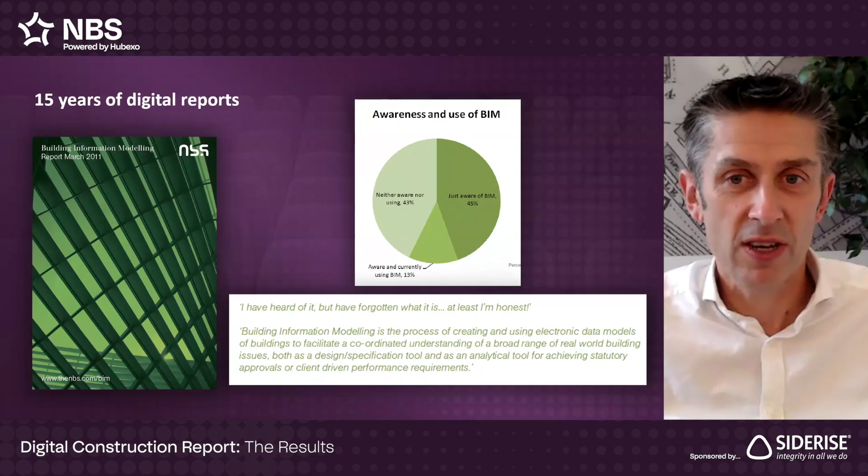I think understanding of BIM aspects of digital has evolved, and the majority now see it as that process of gathering well-structured digital information through the project timeline based on clients' information requirements. And I guess we've gone through a journey from the UK 1192 standards through to the international ISO 19650 series.

So when we ask now in 2025, 15 years on, how would you describe BIM, following the process in the 19650 standards comes out highest, but it is better information management - like building information modeling is modeling the building or the asset with 3D data with information attached, etc. But it's quite interesting looking at how the definition of BIM has changed over 15 years.

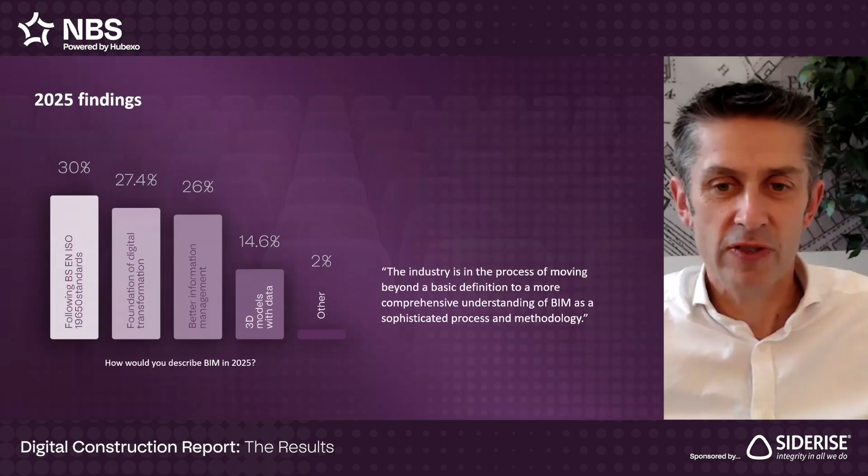In terms of adoption rates from self-declaration, have you adopted BIM? We've seen it move from that sort of 10% up to mid 70% over the 15 years. It's quite interesting just looking at the BIM object sort of thing.

Encapsulating data in an object - we started by asking manufacturers, do you provide BIM objects for the materials and product systems that you supply? We had about 20% of manufacturers saying for all products, in the mid 70s for either all or some.

And then you compare that with the sort of demand side, asking architects and engineers, is it useful to get this information from manufacturers? And it's similar, that sort of supply versus demand, maybe slightly higher - so the regularly or occasionally comes up to near 90% here, whereas it's sort of 70, 75 on this side.

In terms of the basic data structure to classify information, whether it's the design of a building or an asset or the whole project in terms of classification for documentation, project management, or spaces, that BIM ecosystem on a project in the UK, we see now in 2025 that uniclass is the predominant classification system.

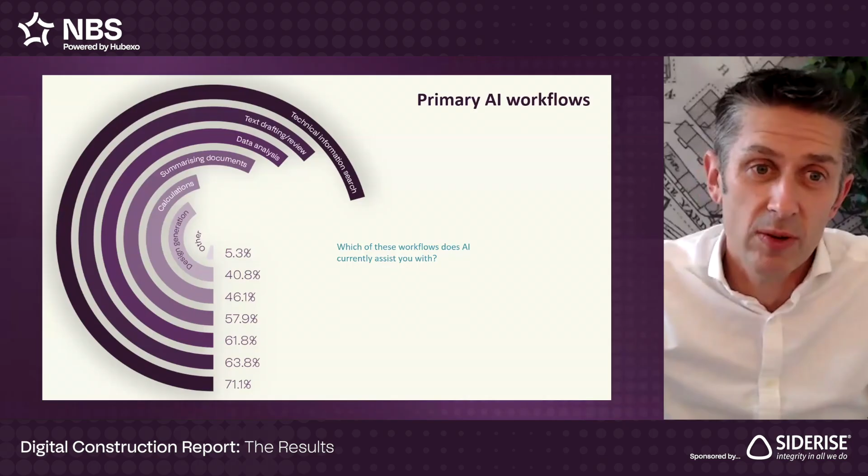It's, I guess, taking away those more monotonous tasks with well-structured data and making them quick. So whether you're searching for the right information, whether you've got some copy and you want to change it around and rapidly look at different drafts, if you're analyzing data, if you're summarizing documents, doing calculations, it's the sort of tasks that you maybe previously would have given an assistant, and it might take a few hours or a couple of days to come back to you for your review.

Maybe not immediately trusting the answer and accepting it, but getting the AI tool to do the initial job, so then you can check and then refine. Up in that 50 to 70% range on those tasks, you can see that in the chart.

And then in terms of the tools, we have ChatGPT currently leading the way, 86%, and then dropping down through things like Copilot, Gemini, Claude, etc. It's a bit like when the internet first started and you saw the different web browsers like Internet Explorer and Chrome and Safari and things.

There's a big race at the moment from the technology solutions in terms of who can accelerate the fastest on artificial intelligence. And then, how do you expect AI to impact your work over the next 2 or 3 years? I think 66% saying significant change, and then nearly 1 in 4 saying it's actually going to be a transformative change to day-to-day work. So it's going to be an interesting next 2 or 3 years seeing where AI takes us.

Other initiatives in technology that we're seeing, and we asked about digital product passports. That's something mentioned explicitly in the EU Construction Product Regulations 2024. So in simple terms, taking the concept of things like CE marking, which has the key technical characteristics of a particular product printed as a label on the physical thing, moving that forward, both in terms of technology and scope of content, to something like a QR code or an RFID on the physical item, which takes you online to give you the technical characteristics of that product and sustainability information, and how to safely install, operate, and deal with it at its end of life.

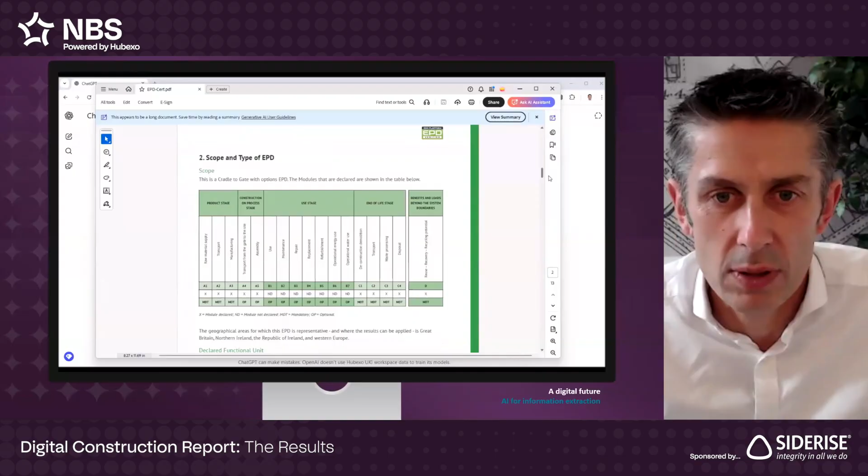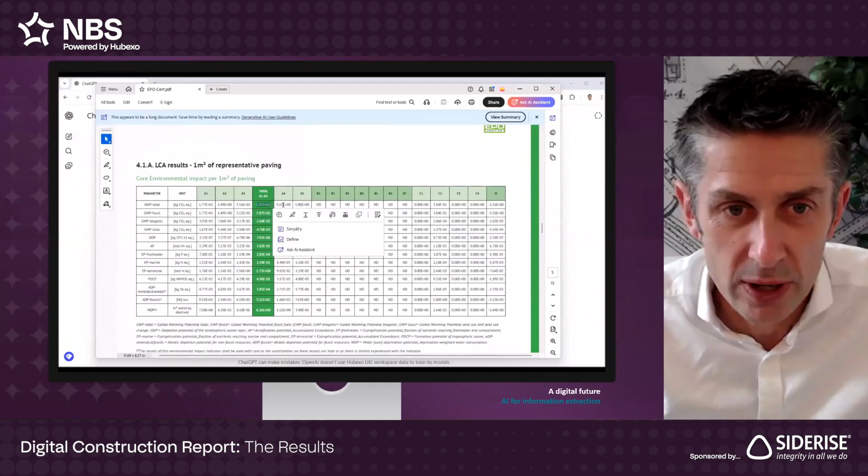So if we have a little look at this example, we let it play. It's an EPD from the manufacturer for concrete slabs or what have you. You can see written into the text in an unstructured form it says there's 1 meter squared of paving as the declared unit. In terms of the global warming total, it's 5.07 times 10 to the power of 1. In terms of assumptions on transport, it's saying the construction site's in Birmingham, the factory's definitely in Northern Ireland, it's going to be a combination of road - so there's loads of great information here. It's just laid out to look pretty in a PDF as opposed to structured data a computer can read, I guess, until AI came along.

Because now I'm taking that semi-structured information laid out really nicely in a lovely looking PDF into data that could just sit in a database. You can imagine running this process on 1,000 PDFs, you're going to build up a really nice set of data. It's got the manufacturer name correct, it's got the postcode, it's got the different variations of the product, 1 meter squared A1-A3, and it's got rid of the scientific notation of 10 to the power of 2 or whatever, 10 to the power of 1.

And it's got the transport split down by road, and there's the manufacturer plant location with a postcode as well.

The last example I'd like to look at is combining well-structured data from a number of sources online and pulling it together as a single view. What I could do here is say, tell me about the elderly burgundy brick from Ibstock, and just send it away on the internet to look at information. But instead, I'm going to send it the unique ID representing this brick from its barcode.

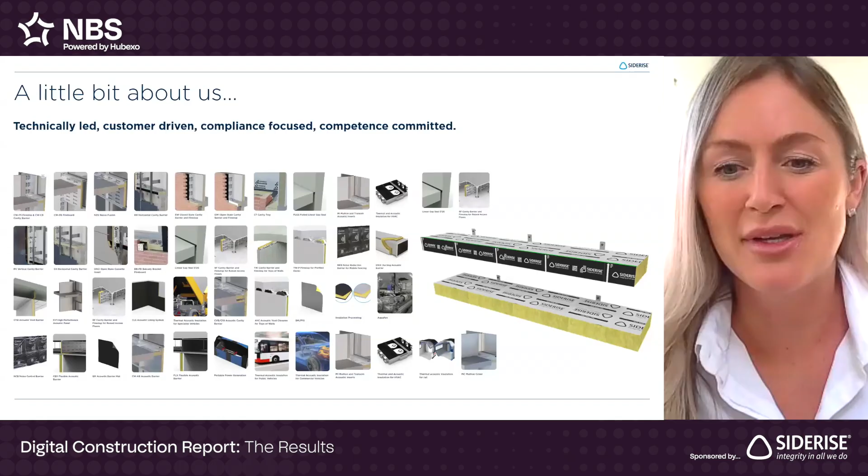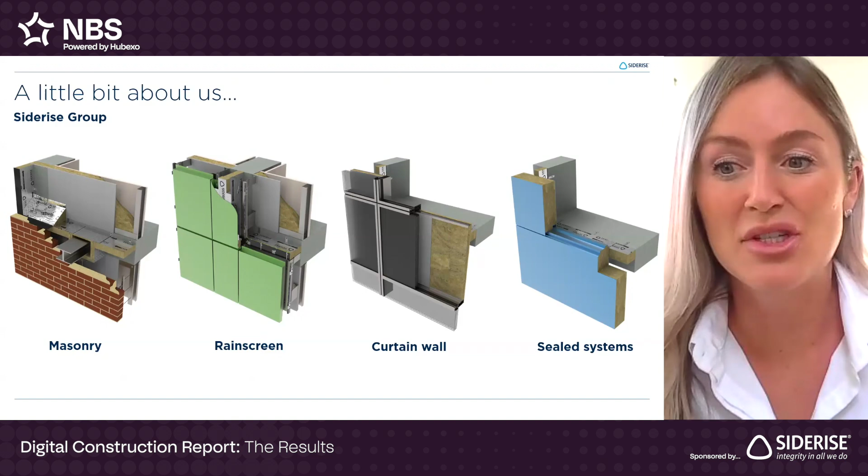We supply acoustic and thermal products for facade and building interiors, and we specialize in the manufacture of tested and third-party certified stone wool, cavity barriers and fire stops that are used in horizontal and vertical orientation to provide compartmentation and resist the spread of fire. These are used in many different applications, such as external masonry, rain screen facades, curtain walling and sealed systems such as precast and composite panel as shown on screen.

As we all know, digital tools are becoming increasingly important in the construction industry for a number of reasons. They help ensure compliance and maintain accurate data records, promote accountability and allow decisions to be tracked more effectively. They also improve project management, increase transparency and trust amongst stakeholders, and encourage collaborative working across the supply chain.

As the industry faces growing regulation complexity, with the implementation of the Building Safety Act, there's a rising demand for traceability and real-time information. Digitalisation is helping us meet these challenges, transforming how we work by making processes more efficient, connected and reliable.

Siderise offer a wide range of digital tools and services that provide support prior to project start, throughout design and construction stages, all the way through to completion and handover. On screen here shows a few that include data easily accessible through NBS, RIBA CPD content, Siderise Learning Academy portal, our Siderise Tech Hub website, NBS cloud-based collaborative specifications, BIM models, standard detailed drawings, digital spec packs, digital site inspections and our inspection app.

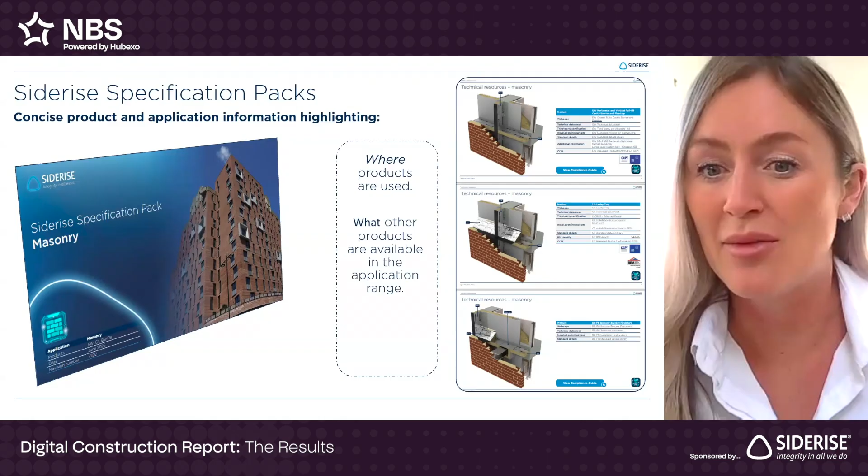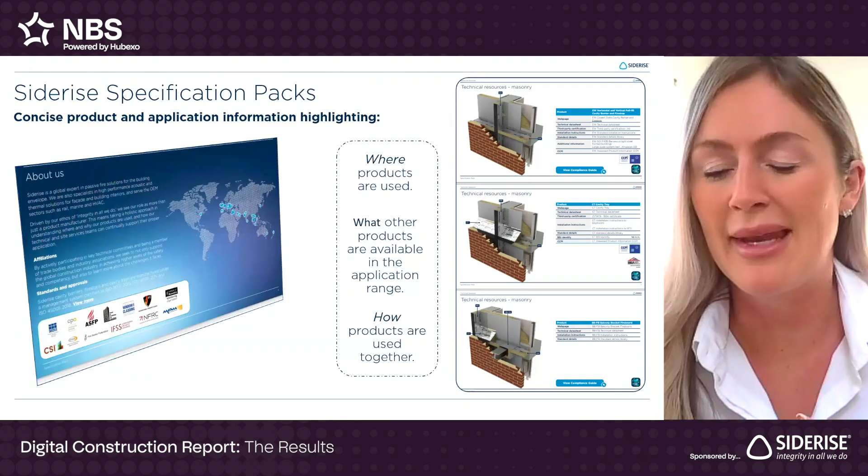These packs provide a packaged, up-to-date digital resource with valued formats of data, including live links to key product information. We decided to make the packs application specific to really help our customers understand where the product should be utilised and what other products are available in the range and how they're used together, offering a systemised approach. Just like a lot of manufacturers, our products have their own references, so offering information in a way that allows customers to easily identify what products they need for a given application.

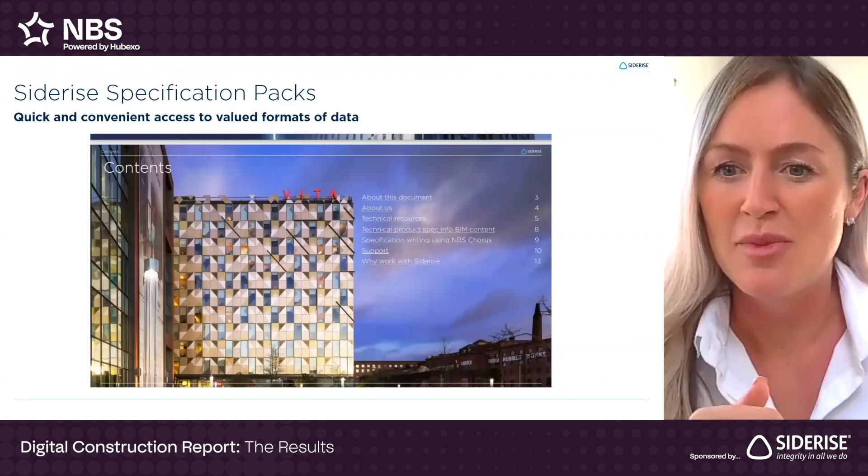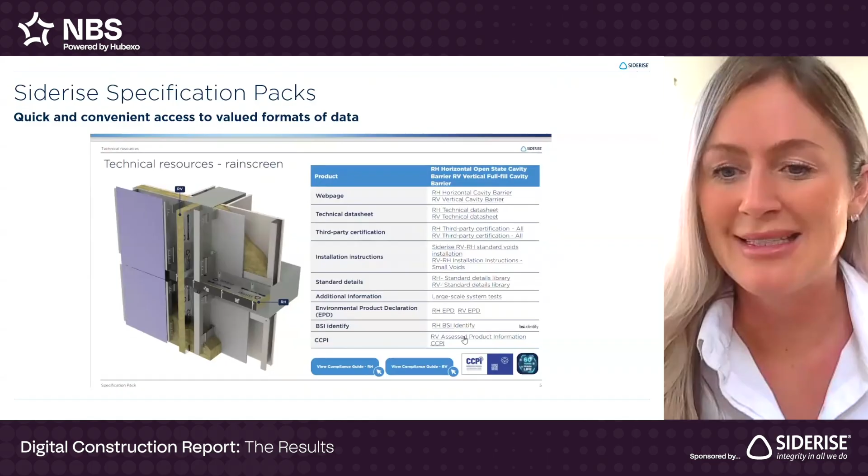We'll take a look at one of the packs as an example—the rain screen pack. The specification pack provides quick and convenient access to tools and information sources, including technical data sheets, third-party certification, standard detailed drawings, EPDs, BIM objects, specification clauses through NBS, and it also demonstrates which products have CCPI assessments. Additionally, by including links to the latest information, users can be assured that they're working with the most up-to-date information and certification, reducing the risk of holding outdated material.

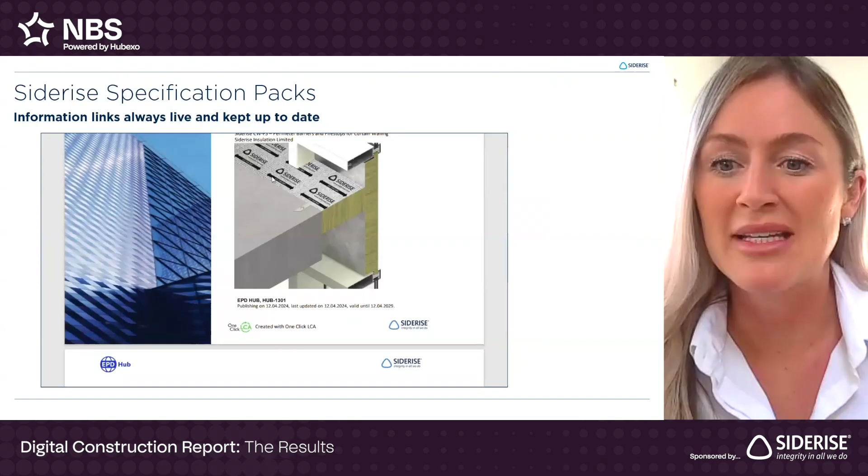All of our specification pack information is linked directly into our Siderise PIM system, our product information management system. We utilise permalinks, so the information remains live and is always kept up to date, and we maintain the version control of the documents within our PIM as well.

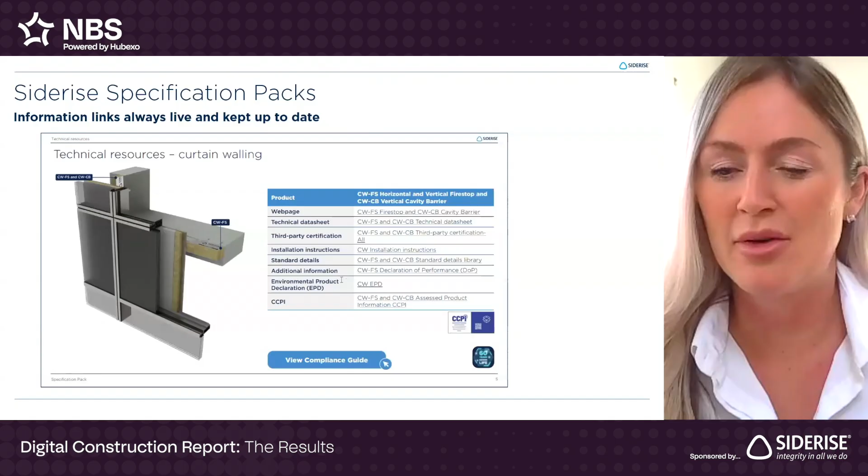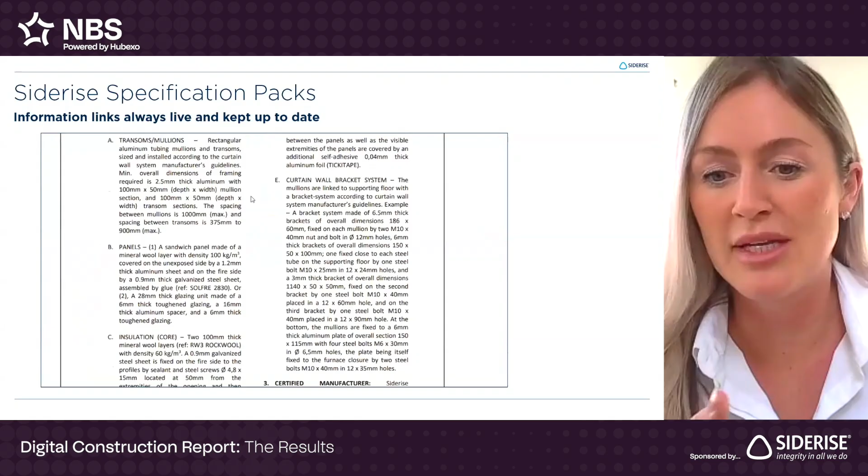We've recently developed path to compliance diagrams that are included into each of the spec packs through live link buttons. The compliance paths give an outline of how the products have been tested and how they meet the relevant statutory requirements. This is aimed to assist all of our customers, including those who are going through Gateway 2 submissions.

Within the specification packs, through our websites and through the NBS and RIBA websites, CPD material can be sourced. In the last year, we've developed 4 new pieces of RIBA approved CPD material. As a company, we're really proud that we're developing this educational material, including RIBA approved CPDs for all of our core products used in rain screen, masonry, and to the rear of curtain wall.

As a company, we want to encourage early manufacturer engagement, share knowledge, and ultimately promote learning. We want to help our customers enhance their understanding of passive fire protection in the building envelope. In our new RIBA CPD, we cover product terminology, testing standards, certification detailing, and additional services that bridge the gap between design and as-built performance.

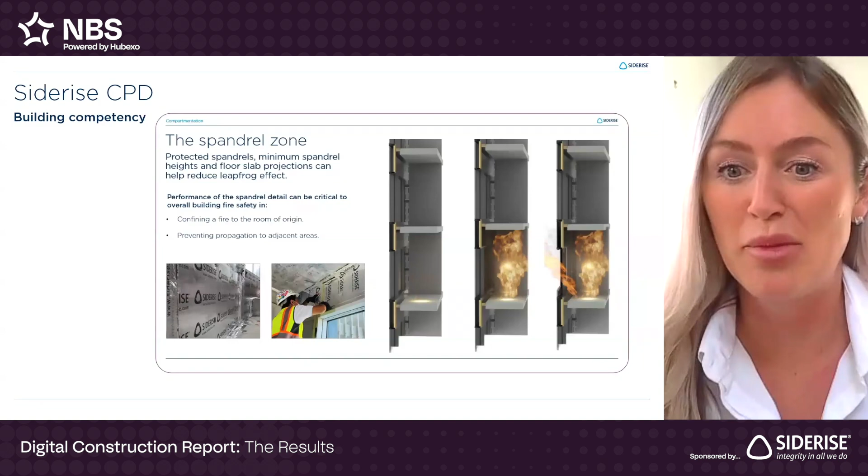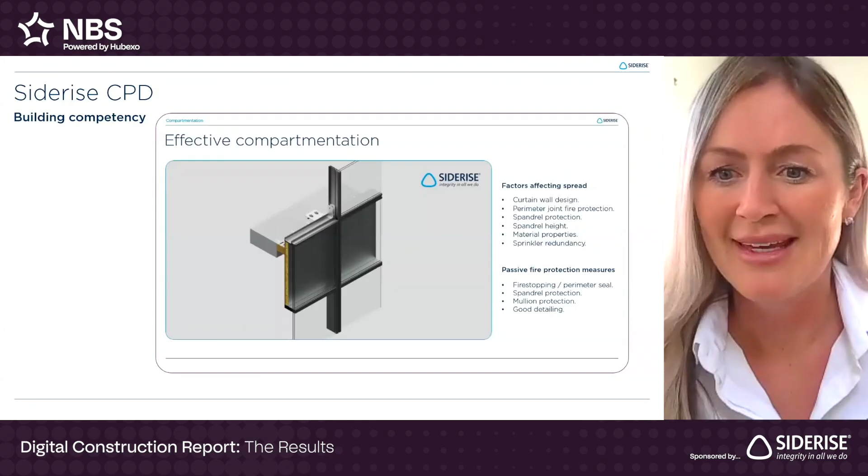We're listening to our customers in terms of additional information they want included in a CPD, such as information on the Building Safety Act and what product manufacturers can do to help contribute to the golden thread of information. In addition to more helpful and relevant content, the slides offer more of a visual approach in terms of videos and moving elements to emphasise important takeaways.

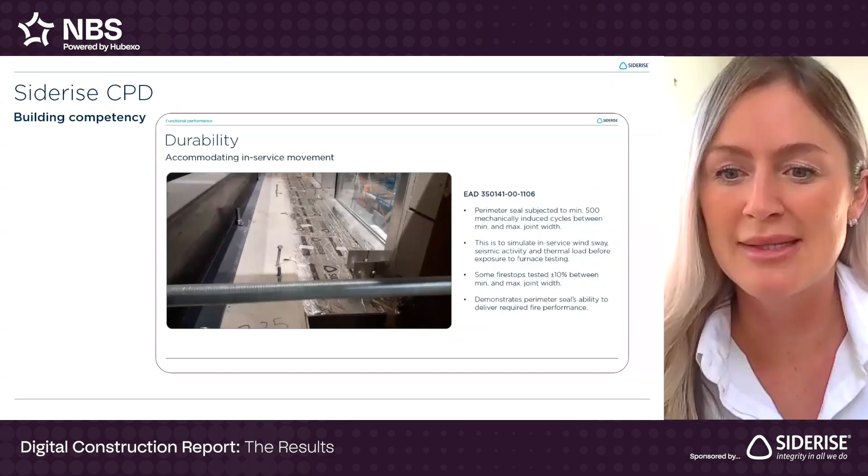As we all know, competency is of major importance in the industry, and therefore we've looked to include and incorporate QR mini quizzes, based through QR codes, into the CPDs for viewers to demonstrate their knowledge and to assist them in identifying where they may need further development.

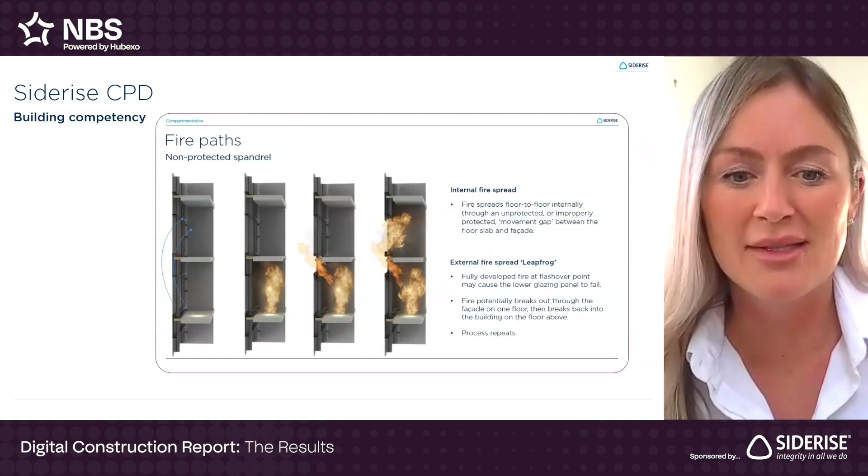So we always do promote face-to-face CPDs. However, we understand that the industry need is changing and people want CPDs in their own time and when it's convenient for them. So we're delivering CPDs in different ways using digital methods to suit the needs of our customers, in the form of live webinars and on-demand learning now through our new Siderise online learning portal.

So the new Siderise online learning portal is completely free to use and it offers CPD content on demand. It gives users flexibility to learn at their own pace. With digital formats of learning modules and live on-demand webinars, the Siderise learning portal has been really well received by all of our customers.

In terms of digitalisation aiding the delivery of structured, robust product data through specification mediums, in addition to specification clauses and detailed drawings, BIM is another well-known digital specification element that can contribute to the golden thread of information and is definitely growing day by day in our industry.

So as we all know, BIM can offer shareable data across design, construction and through to operation. Manufacturers offering digital resources such as BIM models and detailed drawings can really streamline the integration of products into design. And we understand this is growing in terms of our customer needs.

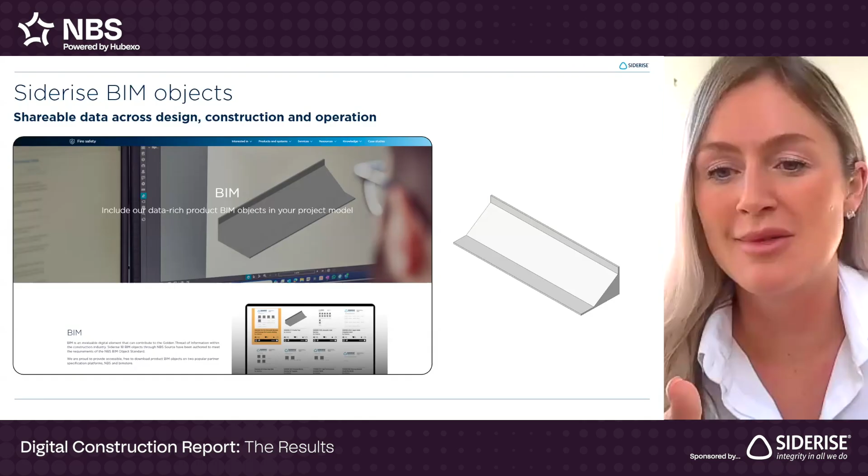So Siderise BIM models have been authored by NBS and have been developed for all of our core product ranges. These are interoperable, meaning they're supplied in Revit and IFC file types. And the models have been formatted in a way that there's data behind them and they're a 3D representation of the product. So NBS were chosen to author the models in order to deliver and manage compliant information within the ISO 19650 framework.

So we adopt an industry standard for quality, efficient, generic objects with core property sets that include a consistent approach to classification, standard naming conventions, and standardized approaches to the level of information.

So the layered objects that we have currently defined as LOD 300 by NBS, with future plans for us to reach LOD 350. As a manufacturer, we're committed to continual improvement within the construction industry and recognise the need for a more collaborative approach. And we have bigger plans for 2026 to develop these models.

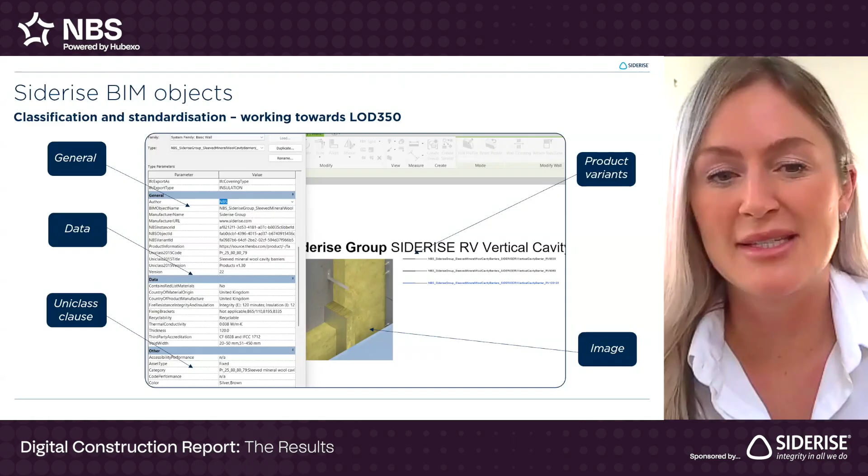In addition to current tools, I know Stephen had raised the point of AI implementation. So Siderise are using AI for a lot of internal processes, especially when it comes to workflow automation and removing repetitive manual tasks. AI is helping us work smarter, speeding up the process and freeing up our team to focus on more valuable tasks.

One great example is that we've automated how projects and opportunities move between Salesforce and our ERP system, our enterprise resource planning. This cuts the workload for our customer services team by 50% during this process. Sales orders and quotes also flow back into Salesforce, so our commercial team get full visibility without jumping between systems. And that's just one of over 10 automation projects making a real impact across the business at Siderise.

So there's a lot of change in the industry in terms of digitalization and implementation of new technologies. Ultimately, we want to offer easy to access, reliable, up-to-date and educational information to our customers through different digital mediums. We want to provide data-rich, standardized digital tools to aid collaboration and that contribute to the golden thread of information. We want to provide services that bridge design and build, enhance communication and deliver traceability. And we want to develop our internal processes and make our customers' lives easier, utilising new tools and technologies.